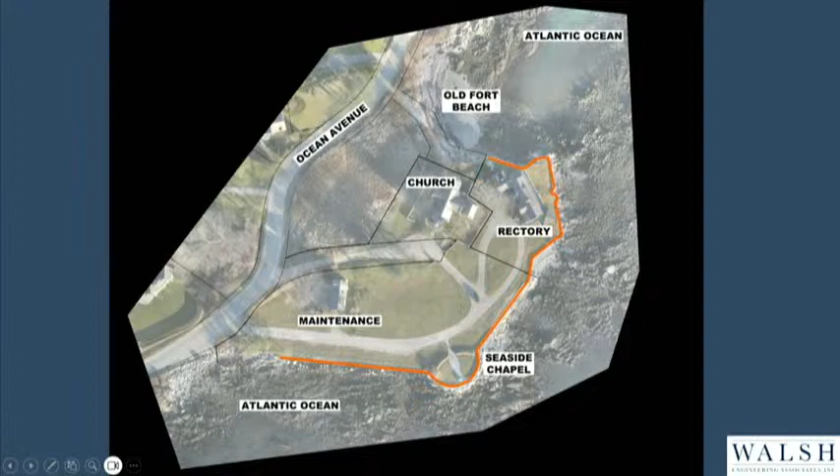Next slide. The wall actually extends off of the property just at the Old Fort Beach side. The green line that crosses there is the approximate property line, and that section in the forefront is a piece of the wall that has extended off of it. There was an easement that we obtained through the town, through a town vote for that property, so that's included as part of our project to rebuild that section of the wall.

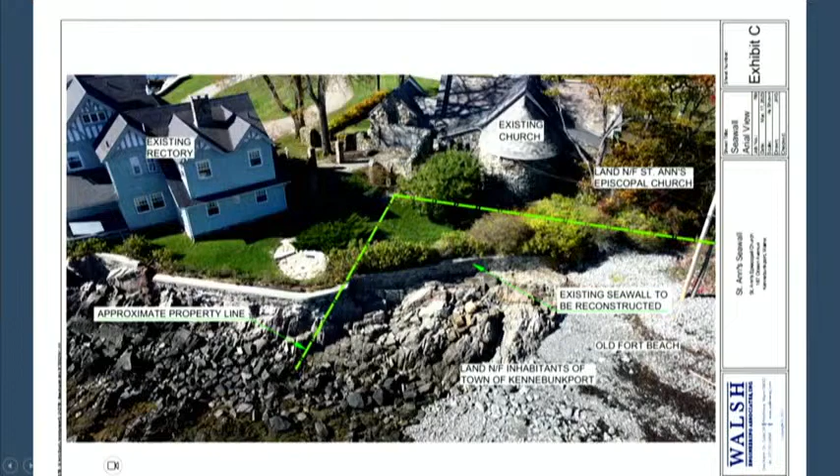Next slide, please. It's a masonry rock and mortar wall, constructed probably from rocks that were just lifted off of the beach and mortared together to create the wall that's there. It varies in height, kind of goes up and down.

Next slide. This is an image from the Old Fort Beach side. You can see it close up. It's got a concrete cap on it, and that's the masonry wall, mostly built on ledge. Everywhere we saw it's built, the base is just built right off of the ledge. It's about 3 feet below the 100-year flood event.

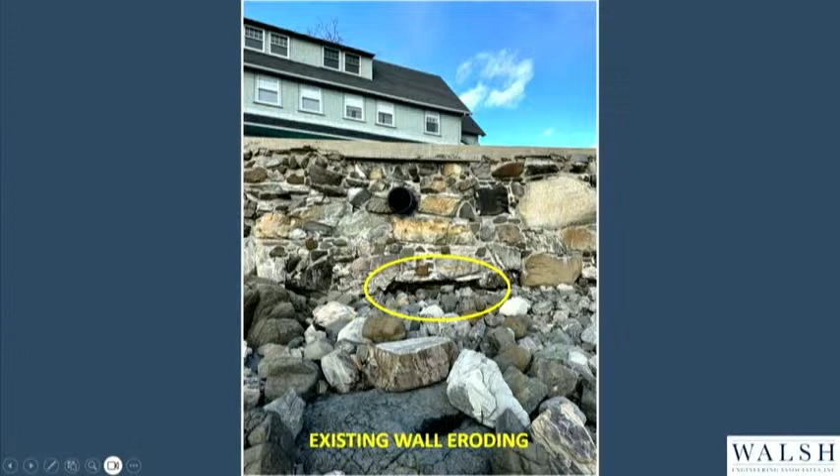Next slide, please. It has seen a fair amount of abuse over the years just from the wave action. What you see circled there is actually a hole in the base of the wall. Next slide. There's holes down here at the base as well. That's the interface between the ledge and the wall where it's just getting hit constantly, and there's water probably that comes from the backside that erodes it. Next slide.

Just a larger view of it. Next slide, please.

Overhead view, again, the wall is shown in orange, and the flood zones are here. If you can see the tags, the zones on the face of the wall are all velocity zones, in the VE zone. Elevation 18 is about where most of it is at. There's a little bit on the very backside that's at elevation 15, but pretty much all of it is at elevation 18.

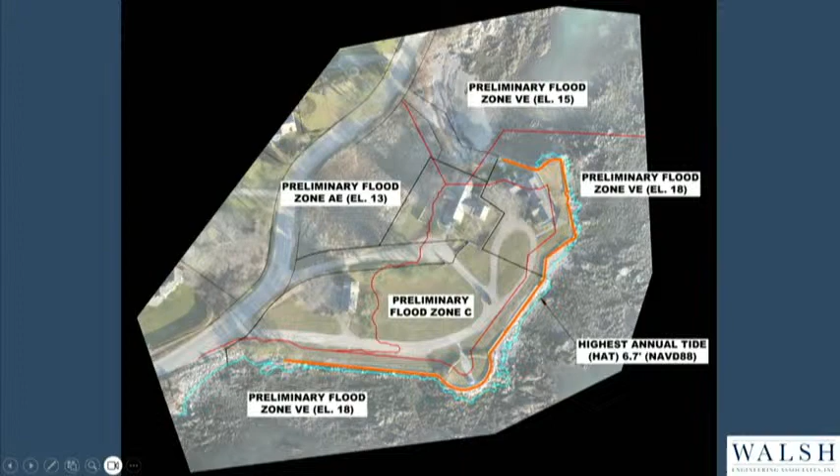Next slide, please. This is a schematic cross-section of the wall, so that's the masonry wall. The blue line is the actual effective flood zones, but the red line above would be the actual 100-year flood zone, which is what we typically design towards. So you can see the top of that wall is at about elevation 15. It varies in places, but on average it's probably about elevation 15. So we're proposing to raise this wall up.

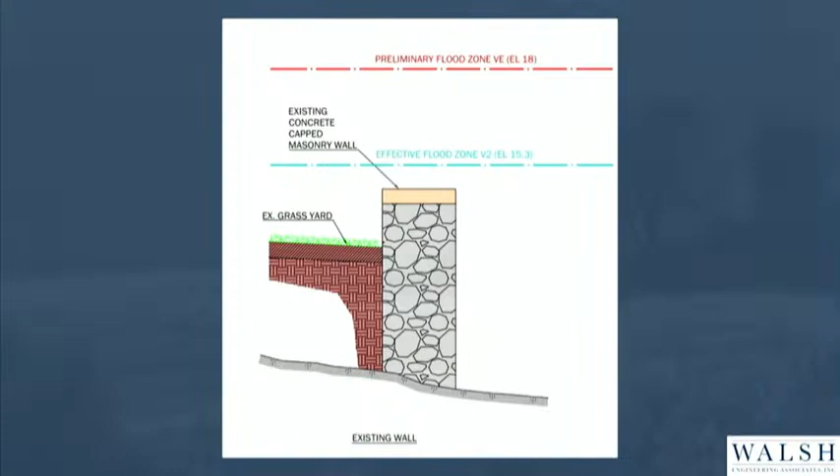Next slide, please. I think this is the video. This wall's taken plenty of abuse. This is the December 23rd, 2022 storm. You can see the waves crashing up on the wall and riding up on it right here along the rectory. All of that caused some significant damage that has been repaired, but you can see, as most of you have seen over time, the storms that hit this coast seem to be coming faster and more furious.

Next slide, please. That's just one of the waves crashing, same storm event that beat on that. You can see the splash actually probably hits the rectory there.

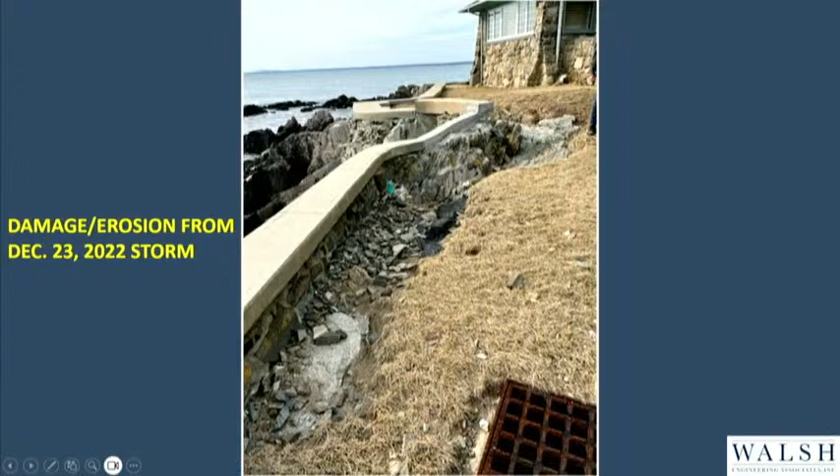Next slide, please. This is some of the damage that was done from that December storm, and you can see it gets over the top of the wall and typically washes it out. It's those erosive velocities running, that wave you saw running along the side, that water goes over the top and just erodes the backside of it.

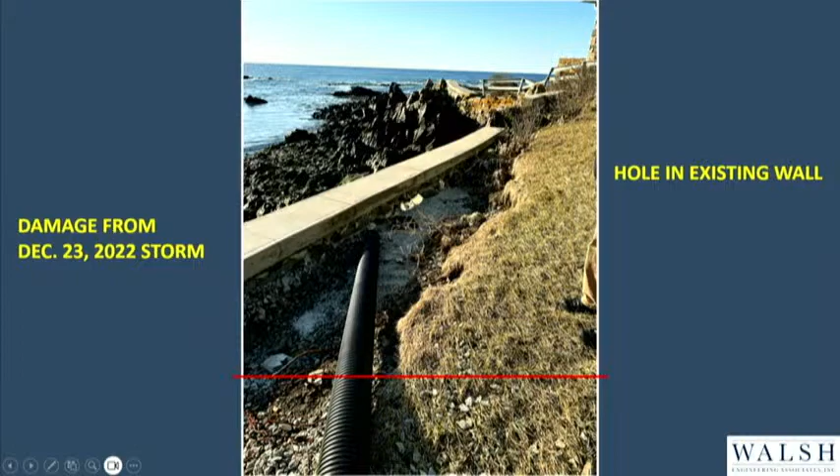Next slide, please. Again, I don't know if you can see right in the center, there's actually light in there, towards the end of that pipe, and it actually poked a hole through this section of wall. Next slide, please. And that's over by the back of the church where it ripped up all the pipe that was there and eroded that backside.

And this has happened before. There's a little patio by the end of the pipes there that has gotten wiped out once or twice. So this is a continual problem we've been seeing on the backside. Next slide, please.

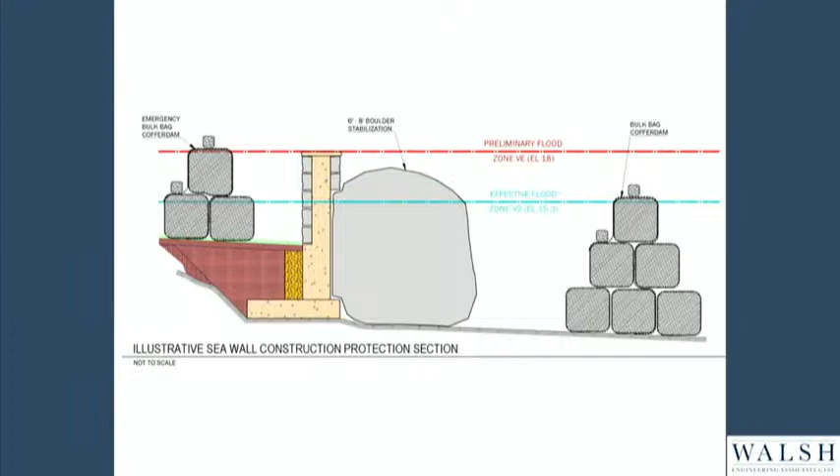You did get copies of the plans, and we've advanced them a bit further based on the comments from the last meeting. The plans now include a profile view, looking at the face of the wall, since we're advancing to construction set level. We needed to know where the ledge steps up and down, so this wall will step along there, and that gave us that visual representation in the plans.

We've adjusted some cross-sectional views so we knew where the critical places were that we needed access. The corner you're looking at is from the beach, looking back on the backside of the rectory. There's a corner very close to the rectory—within about 6 feet of one another. So we've adjusted the wall a little in that place, pulling it away from the rectory because of constructability; we can't get too close and undermine the foundation.

It also gives us space to put our footing in, so it got pulled out just a little there. On the other corner, the ocean-side, southerly corner of the rectory, it's very tight—I think I talked about this last time—we've bumped it out a little for the same purpose, to provide enough space to build and gain access.

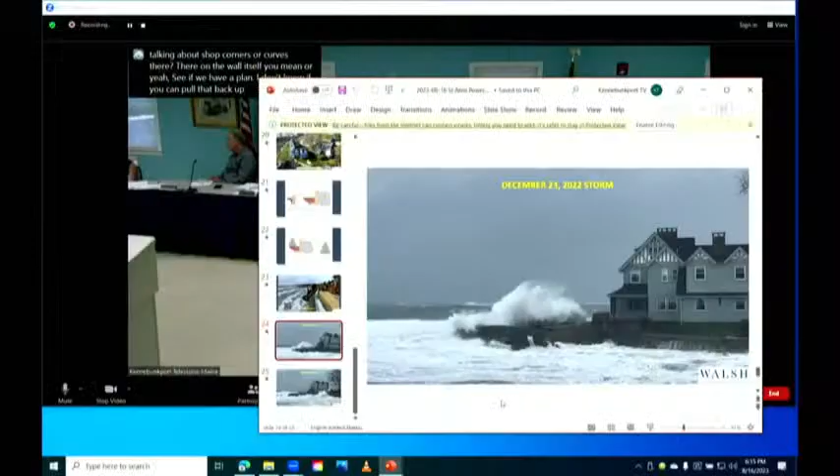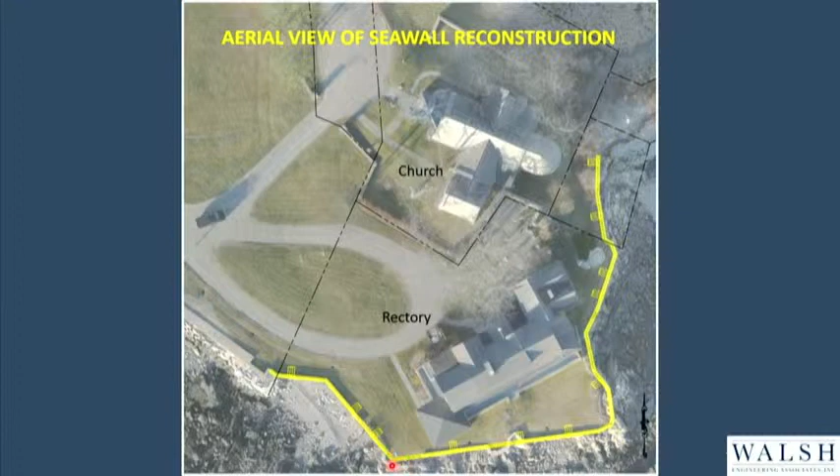Okay, members of the board, questions? Yes, I have some questions. So thanks for saying there's a revised plan. Yep, I did take a look at them. So,

Okay, that was one of my questions then. Starting on drawing C3.3, I did look at the floodplain management ordinance, and according to that, the height of the walls should be 2 feet above the flood zone elevation. So it seems like the top of the wall should be at elevation plus 20. Can you make that change?

I think part of the challenge with that's gonna be the visual effect of that. Well, I thought about that, but that's what the ordinance requires, so you're gonna apply for an exception then? I think we will, yeah. So you are applying for an exception? Yeah, I think we will. I honestly didn't see that, Larry. We can certainly request that.

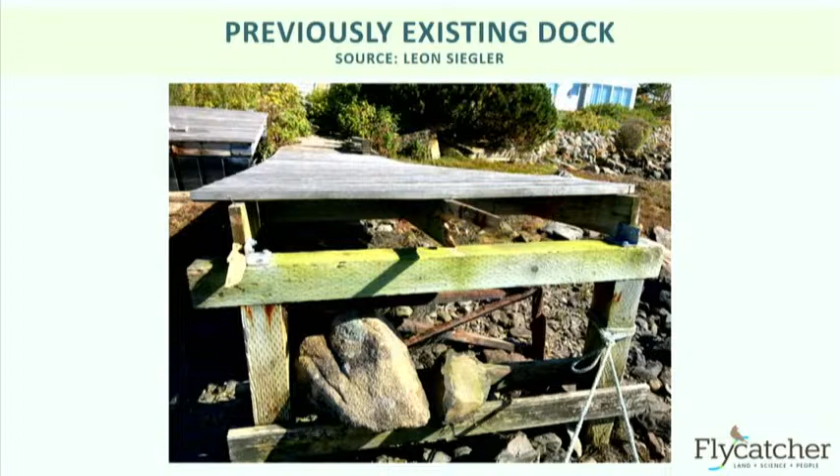Next slide, please. This is just showing you another image of the pier, the portion still in place. The other part you saw in the water was ripped off, so this is what was left. Again, the float is there, and the concrete pad is further inland - you can see it in between the shrubs there.

Also, comparing with the other photo showing the float in place, that float measures 8 by 10. Although there's no tape measure visible with great clarity, you can get a general idea that the width in relation to the float is 6 feet. I was looking through Michelle's comments, and the burden of proof is on us to show that it was 6 feet. We have aerial imagery we used to measure - not the greatest because there can be a margin of error - but I also have a report from 1996, a complete appraisal, which makes note of a 6 by 100 foot long pier. I can provide that with the next package of information. So next slide, please.

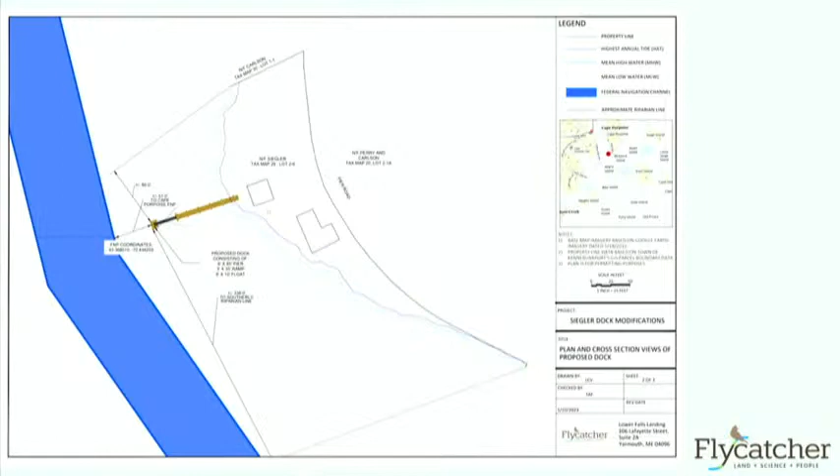And then this is the same image. Unfortunately it's a little whited out there. It doesn't really show the contours, but it's just the same image, it just doesn't have the aerial background. And then the next slide, please.

I guess it's hard to see on there. I should do a darker background on the next round. So the ramp will be 3 by 36, and that will connect to the 8 by 10 float that's already there.

The pier will be supported with pilings pinned to the ledge. It looks like a little bit of artificial fill, but that image from 1962 seems to show that that's what the level was. From my biology background, it looks like a little bit of artificial fill. I mean, it could be 100+ years old. But the pilings will be secured to that area.

And the seasonal ramp and float, again, will be removed in the off-season. The float will be secured in place with chains that are pinned back to the ledge, as it is now.

We have applied to the Army Corps of Engineers as well as the DEP. When we looked at this, we thought, well, we could easily submit a permit by rule to the DEP, have a permit in 14 days and go on our way. But again, a best management practice for a project like this is to build something that you hope has the longevity. And clearly the structure that was there before did not have the longevity, maybe for a number of reasons, but one being that the pier should be raised to provide that elevation above the highest annual tide line.

So the start of the pier - if you could put the cross-section back up. Okay, it's the last slide for this. Go on, other way, back one. So the start of the pier is essentially where we start our measurement.

So the wide section, the brown section of this, that is what we're calling the pier, and that's 6 by 85. This appraisal, again, from 1996, I wasn't involved with it, so it's hard to say exactly how this person may have measured it. But what I have here is a note in this report that just says at least a portion of the dwelling is located in the V2 flood zone. Additional features include a 6-foot wide by 100-foot wooden pier.

1996, it could have also - the floats are wood. Nowadays you use an aluminum ramp typically. There are wooden floats out there. I can't 100% say exactly how this report measured it, but I just know from my research that I've done with aerial imagery, what I found was a 6 by 85-foot long wooden pier portion. That's the permanent portion, so we're staying with that.

The reason I brought up this appraisal report was mainly because of the width, because again, the burden of proof is on us to show that it was 6 feet wide. So I can say with clarity that it was 6 feet wide based on this report.

But is the length also something that's non-conforming or whatever? Yes. So the width - okay, I can see that it looks like it was 6 feet wide before it got washed away. But I'm still trying to figure out how long it was, so we're not going any longer, and I can't provide the length of that for sure.

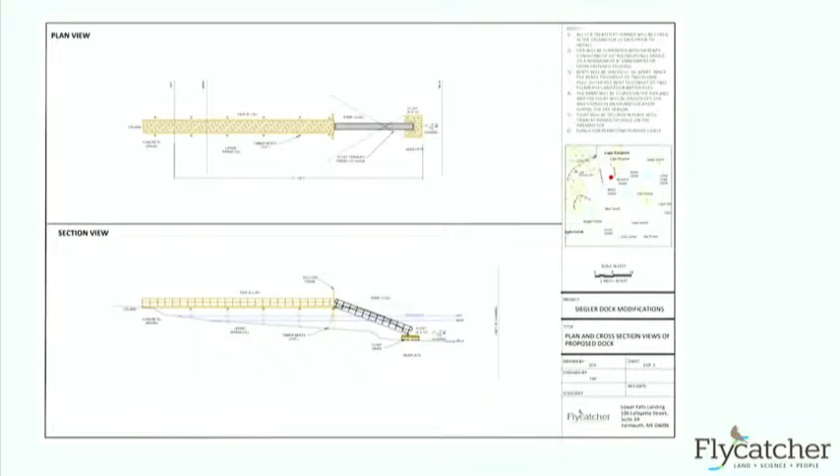Couple of questions, and I don't have the ordinances in front of me - maybe code enforcement can help out. This came down in the storm in October '22? October, yes. Okay, and what's the time frame for rebuild? It's a year.

So that works. And because right now, if it were a new dock, it'd be 4 feet wide and no longer than 100, and it would not be in the velocity zone. Correct - those all make it non-conforming, which is one of the things the application notes.

We talked about is that you are moving it back onto the concrete pad. How much, and how is that changing the length, or is it changing the length? It is changing the length in the upland, correct, and I can get you that exact number - we would definitely need that plan, because that's different from what it was before.

My starting point is different. Right, exactly, the starting point is different, so we're starting that further back. That figures into the total length. It would be very good to have a diagram that shows the original as best you can.

With the concrete pad, and then an overlay on that that shows basically what you're doing new - because I got as confused as you did doing that. And also, in each one, where the velocity zone is, whether you're going closer or more into that V zone.

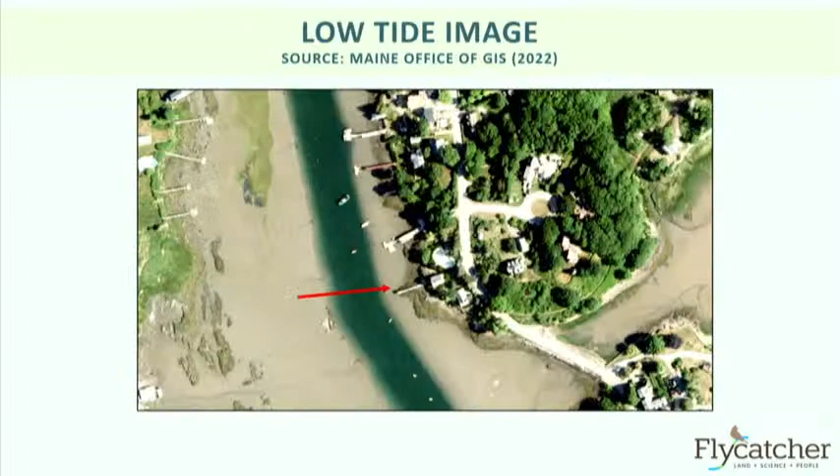If you could bring up sheet 1, that was also included. I did, under the section of the ordinance and the application, I mentioned... just keep going, keep going, yep, all right, this one right here.

Oh sorry, yeah, so when we looked at this, as far as a replacement in a different location, we don't want to go further to the north because the neighboring property line comes in a bit there, and it's good to keep a respectable distance, even though technically you could go within 25 feet of the sideline setback.

We looked to the south, and we're not going to put it at the very south because the roadway is right there. It doesn't necessarily make sense from an access perspective, with the road so close by, if you had kayaks or other watercraft like a paddleboard.

So we're essentially applying under Article 8 of the land use ordinance. And so we couldn't—I mean, that would just kick it out right there.

And as far as the length goes, you'd have it stop pretty short, and you'd have much more restrictive tidal access than what they have now. It's just that you'd be putting the pier back into a place where it juts out more than any other place on the shoreline. But again, we wouldn't be able to put a new pier here because it's in the V zone.

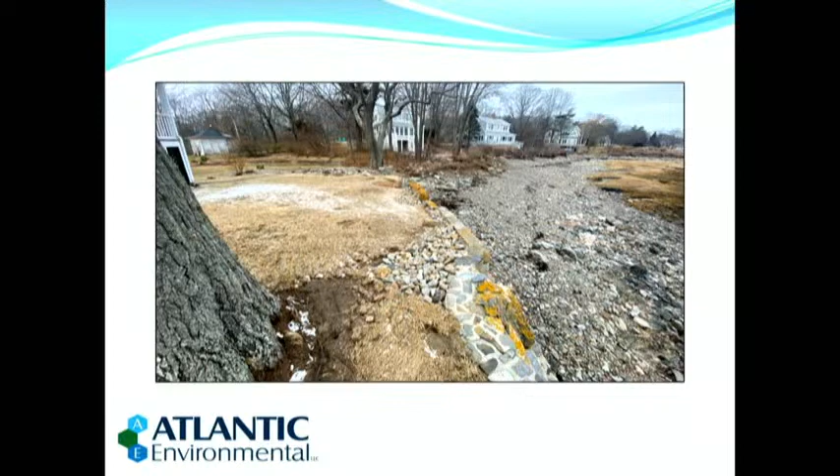This is showing you looking back, like in the other image, but now looking back towards the northerly property line. You can see that in some areas where the storm surge has come in over time, there's just essentially been a Band-Aid placed with some stone. What we intend to do here is place the granite block on top of the wall to raise that elevation, and then riprap will extend in front at a 1-to-1 slope. Here's another picture of that wall, you can see the base of it is a bit undercut.

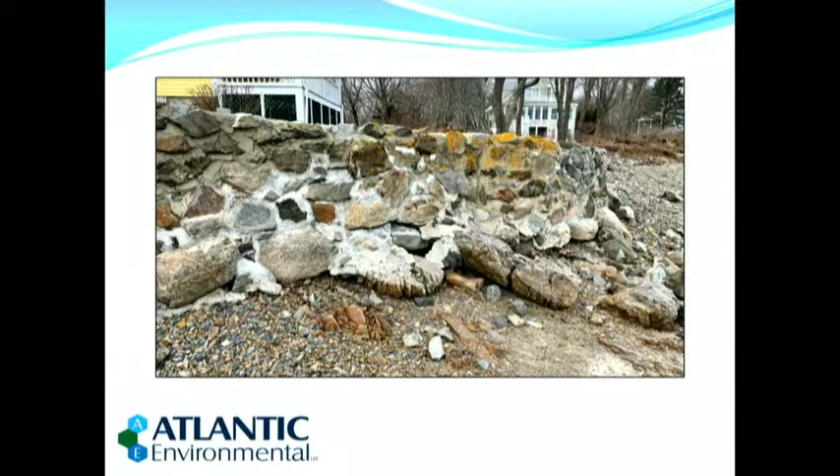Not only from the wave action, but you have the storm surge, and then just the age of the wall in a coastal environment has been pretty harsh, but it has lasted quite a while. This is an area of the property where they're seeing more and more storm surge as these coastal storms increase not only in frequency, but also intensity.

The vegetation in this area has been getting trampled because it is a cobble beach in the intertidal. It's getting overwashed with those cobbles as they wash up during the storm. So what the applicant wants to do in an attempt to stabilize this area and save the vegetation is basically place riprap in this area.

And I'm going to go through the plans. This is just showing you, again, the cobbles that have washed up from the storm. It was pretty incredible. We were talking to a neighbor, and I think even some of the cobbles ended up on folks' roofs. So that was an intense storm, but what we are seeing is they're definitely increasing in frequency.

So this is the overview of the plans that you have in the packet. We've taken basically a 3-prong approach to this. You have the existing wall directly in front of the residence, where we're not touching that, as I mentioned. Then beginning at the flagpole section, we're referencing this as Area A, and that's the section of the wall with the concrete cap, right here, where the wall was in a bit of disrepair. As you move to the north, we transition to Area B, and there's a transition area in between.

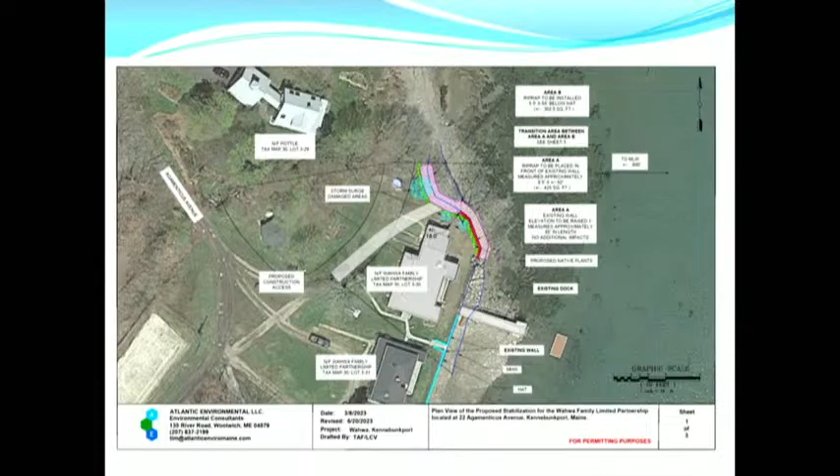It seems to me the difference between this and St. Anne's is you're not having to put a coffer dam in there because you're not working in the water. Here you're basically up on the shore, so you have the access, whereas there you were literally in the ocean. If this was in the middle of Goose Rocks Beach, you'd have to come in from the sides and go up the beach, and none of that applies here.

Yeah, I'm not driving over anybody else's beach. And what you're doing isn't going to disturb and deflect water onto some neighbor's property either? No, we were in communication with the property owners to the north, because I know they had some concern. As part of DEP's process, we did hold a public informational meeting, which was great to get in touch with them, because there was some concern about the angle of the property line, so we were able to work through that.

And then what we've done is basically tapered it down. With the scale of this, you can't really see it, but when I zoom in on my CAD file, I can see I've left a gap. I think I'll submit another scale here, just to show it a little closer in that region, just to show that it does taper down and there is a gap. The intent is also to wrap in a couple plants, just to ensure that as that energy dissipates going to the north, it's tapered down to a large stone at the end, and then just a little bit of shrubs right there.

Do adjacent properties have similar erosion problems, or is this a unique location? Yeah, we actually were in contact with the abutters, and they were a little concerned about how this might affect erosion for them. But we went and looked, and honestly, it seems well vegetated. You have cobbles, you're certainly getting cobbles washing up, but it wasn't to the extent that the vegetation was damaged.